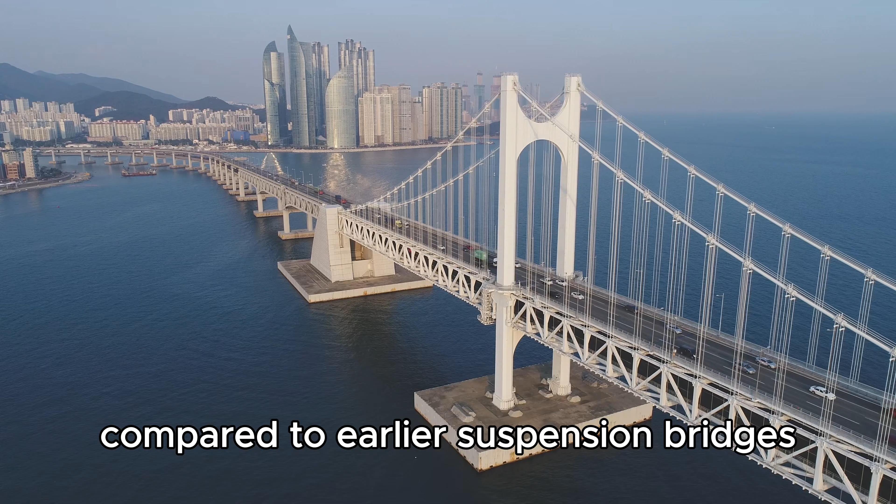Compared to earlier suspension bridges, the Tacoma Narrows Bridge used a slimmer design that required less steel and significantly reduced construction costs. To many people, it was a masterpiece. Construction moved quickly, and excitement grew as the project neared completion.

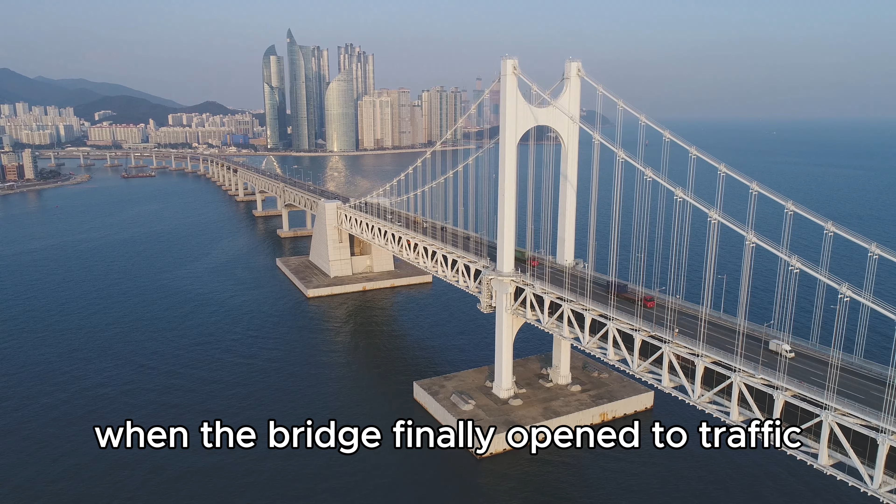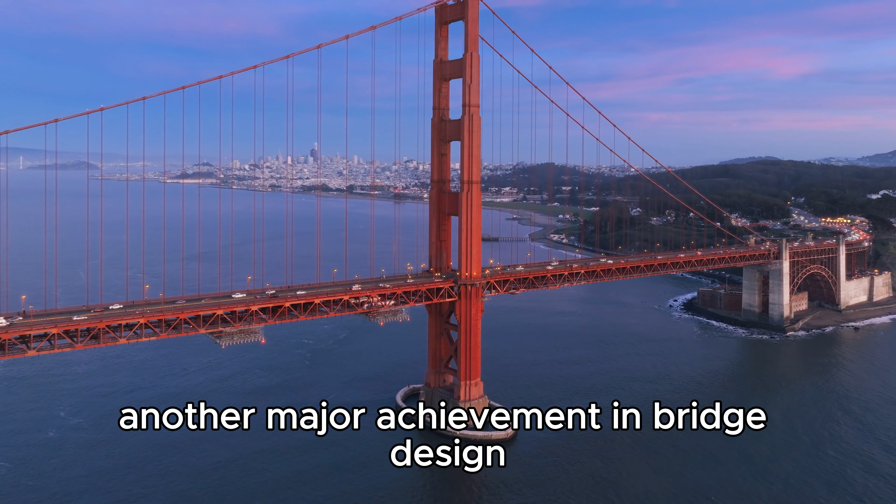When the bridge finally opened to traffic on the 1st of July 1940, thousands of people came to witness the event. Newspapers praised its beauty, drivers admired its sweeping views, and engineers celebrated what appeared to be another major achievement in bridge design. But hidden beneath that elegant appearance was a problem nobody fully understood.

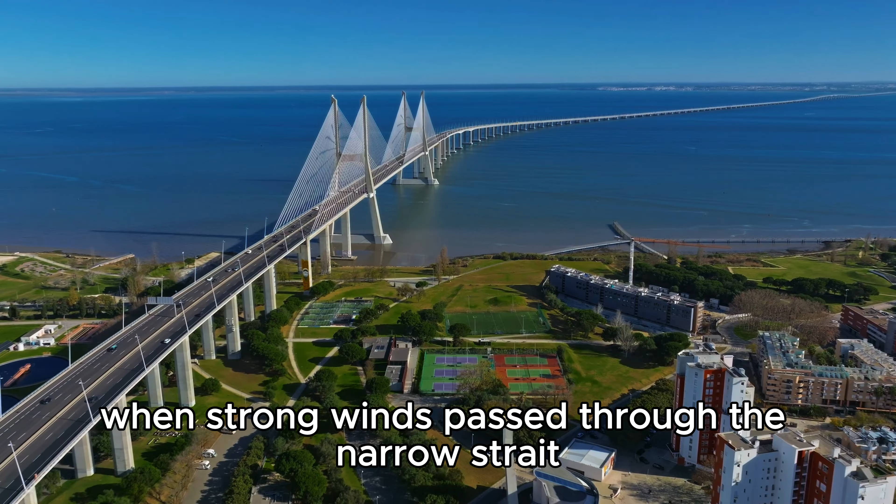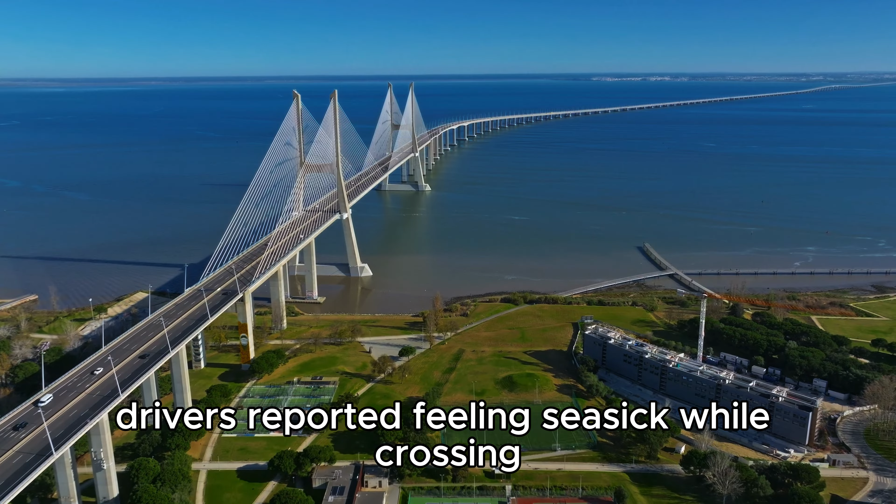Almost immediately after opening, something unusual began to happen. When strong winds passed through the narrow strait below, the bridge started to move. Not a little, a lot. The roadway would rise and fall in large rolling waves. Drivers reported feeling seasick while crossing. Passengers described the experience as riding on an ocean swell. Some people were fascinated. Others were terrified.

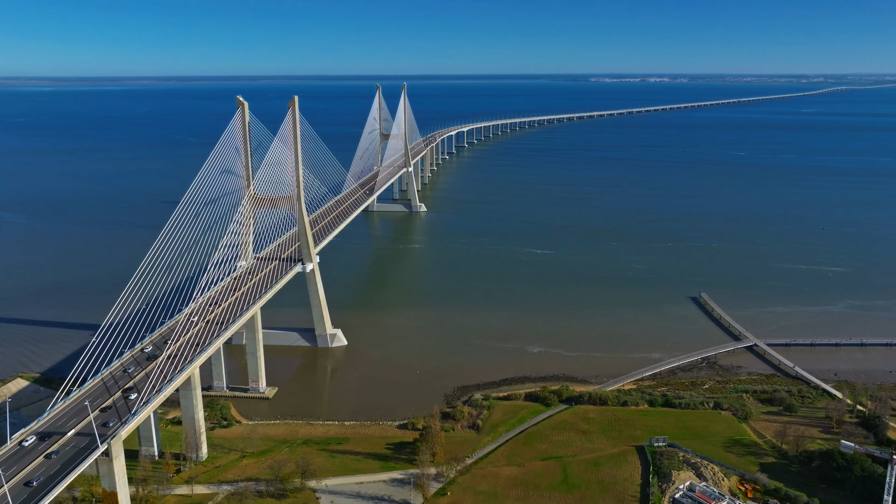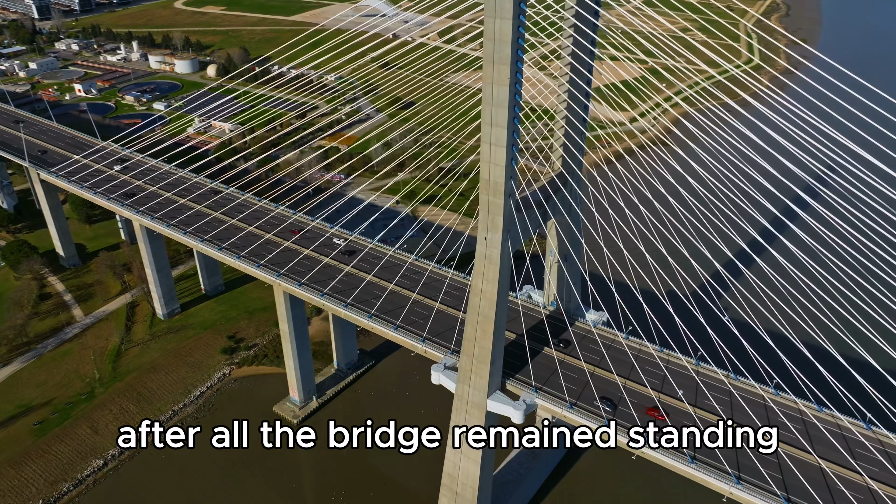The bridge quickly earned a strange nickname: Galloping Gertie. At first, the movement seemed more amusing than dangerous. After all, the bridge remained standing. Traffic continued to cross, and engineers believed the issue could eventually be solved. But what looked like a harmless curiosity would soon become one of the most famous engineering failures in history.

Many engineers remained confident. They believed the bridge's movement was simply an inconvenience rather than a serious structural threat. Small adjustments were discussed. Possible solutions were considered. And few people imagined that the bridge's unusual behavior would soon attract worldwide attention. Because just 4 months after opening, the bridge would destroy itself.

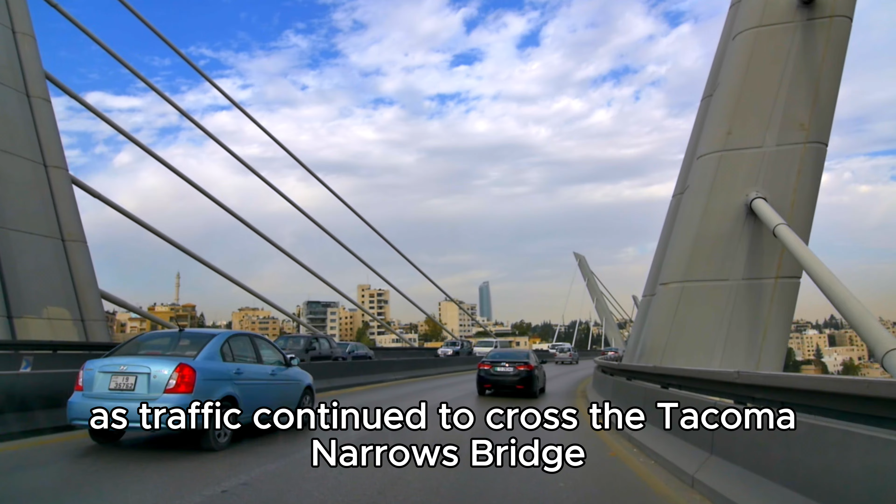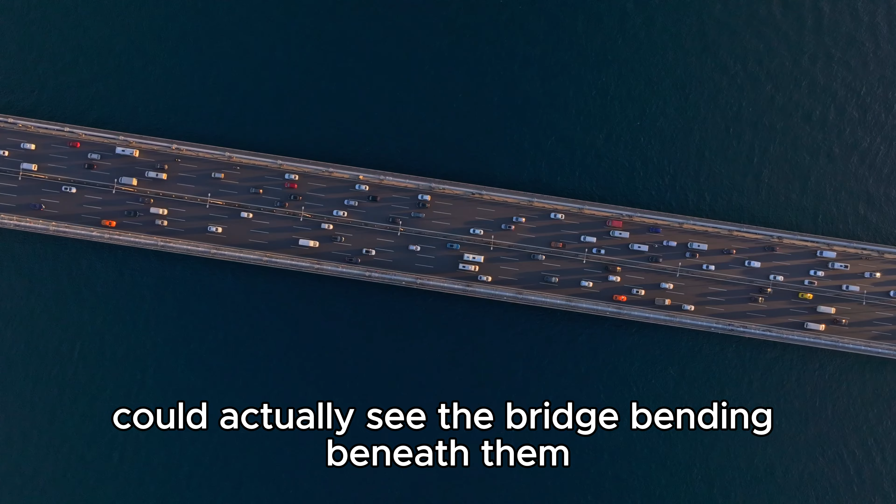As traffic continued to cross the Tacoma Narrows Bridge, its unusual behavior became impossible to ignore. Almost every day, the bridge moved. When winds swept through the narrow channel below, the roadway would begin rising and falling in long, rolling waves. Drivers could actually see the bridge bending beneath them. Some vehicles bounced up and down as they crossed. Others slowed to a crawl, unsure of what they were experiencing.

The motion was so unusual that many local residents came simply to watch. Photographers captured images of the bridge flexing in the wind. News reporters began covering the phenomenon, and before long, the bridge had become something of a local attraction. Its famous nickname, Galloping Gertie, spread throughout the region. People joked about the bridge. Visitors stopped to observe it. Some even crossed it just to experience the strange motion for themselves.

But behind the curiosity and amusement, engineers were becoming increasingly concerned. Large bridges are designed to move. Expansion, contraction, and minor vibrations are completely normal. But the Tacoma Narrows Bridge was behaving differently. The movement was becoming larger than expected. And more importantly, it was happening repeatedly.

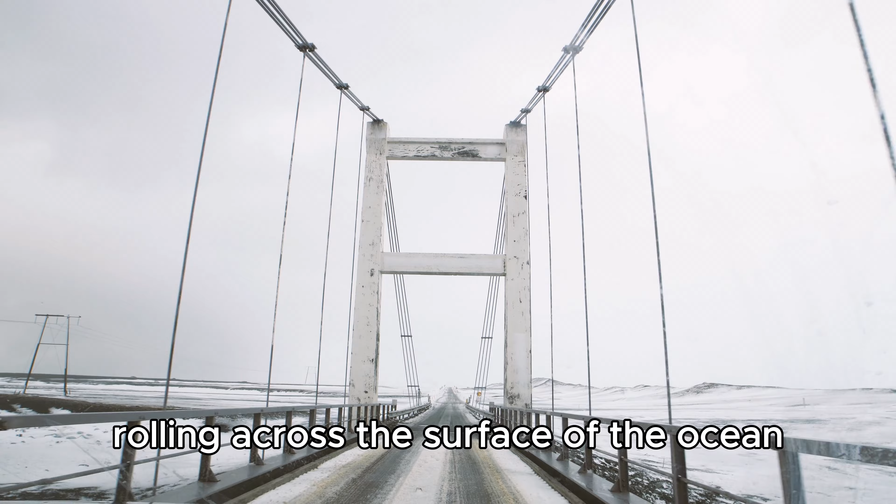On windy days, the bridge seemed almost alive. The deck would rise, then fall, then twist slightly before returning to its original position. Witnesses described the motion as similar to waves rolling across the surface of the ocean. Several attempts were made to reduce the oscillations. Engineers installed hydraulic dampers designed to absorb some of the movement. Other modifications were proposed and tested, but none of the solutions proved completely effective.

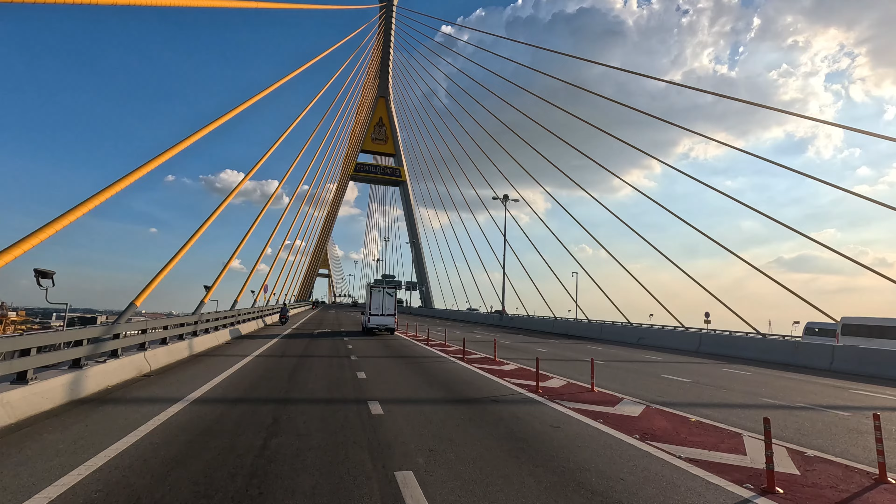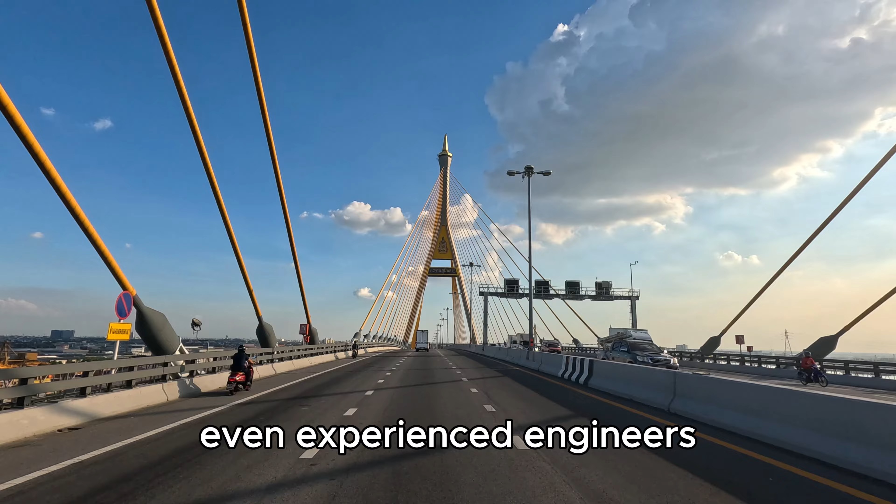The bridge continued to sway. It continued to bounce, and each windy day seemed to produce the same unsettling results. Some drivers refused to cross it altogether. Others reported feeling nervous every time they approached the structure. Even experienced engineers struggled to explain exactly why the bridge was moving so dramatically.

At the time, the science of aerodynamic behavior in long-span bridges was still developing. Many of the tools and testing methods used today simply did not exist. As a result, the true danger remained hidden. What appeared to be a strange but manageable problem was actually a warning sign. The bridge was revealing a weakness that nobody fully understood. And with every passing week, the risk continued to grow. Yet despite all the attention, the bridge remained open.

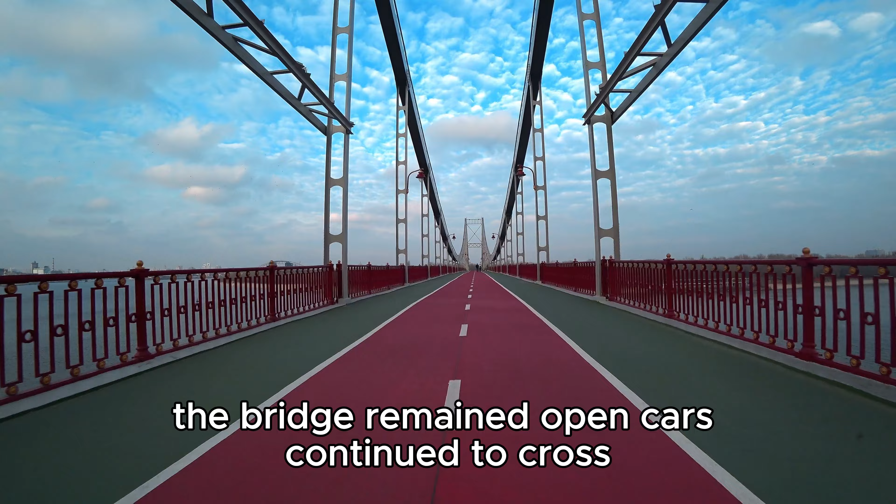Cars continued to cross. People continued to watch. And few realized that the countdown to disaster had already begun. For months, engineers searched for answers. Why was the bridge moving so dramatically?

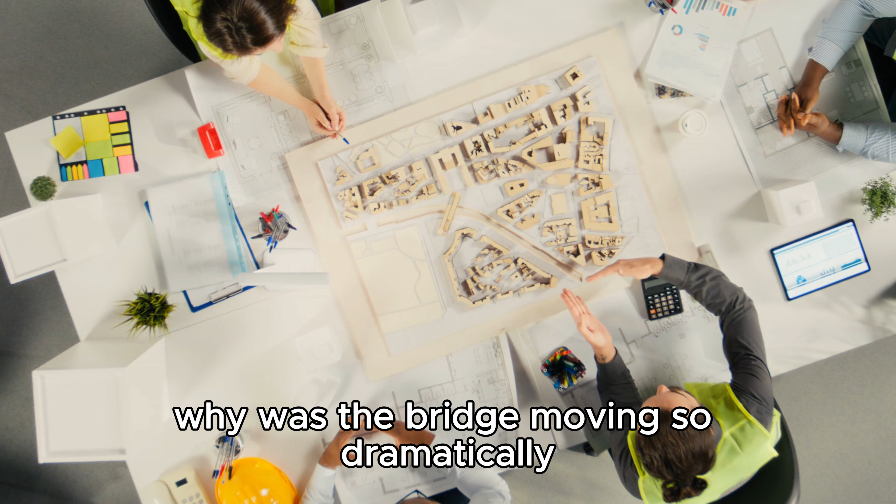At first, many experts believed the problem was relatively simple. Strong winds were passing through the Tacoma Narrows. The bridge was lightweight, and the structure appeared to be unusually flexible. The assumption seemed reasonable, but the real explanation was far more complex. To understand what happened, we need to understand how suspension bridges behave.

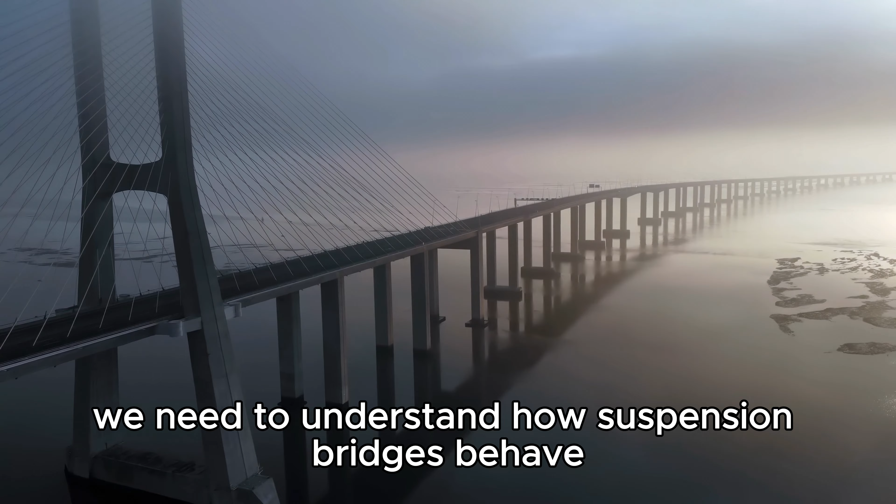Unlike solid concrete structures, suspension bridges are designed to move. They expand and contract with temperature changes. They respond to traffic loads, and they flex under wind forces. A certain amount of movement is completely normal. The problem begins when movement starts feeding itself. And that is exactly what was happening on the Tacoma Narrows Bridge.

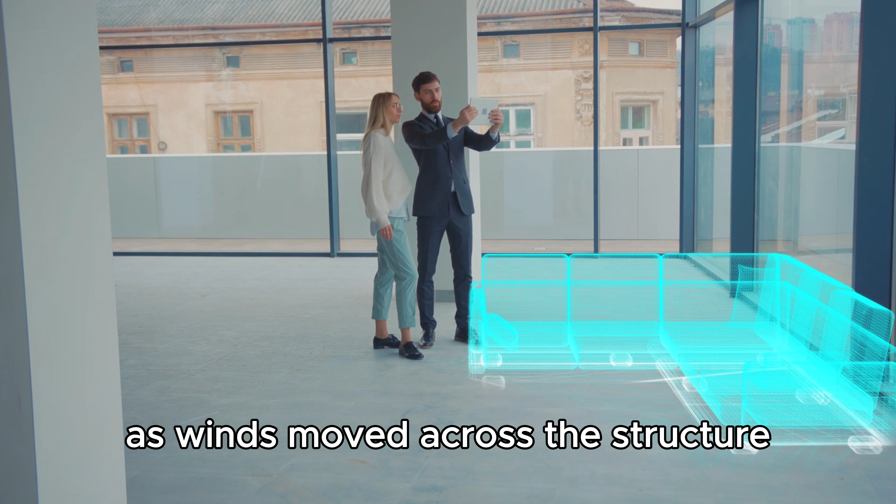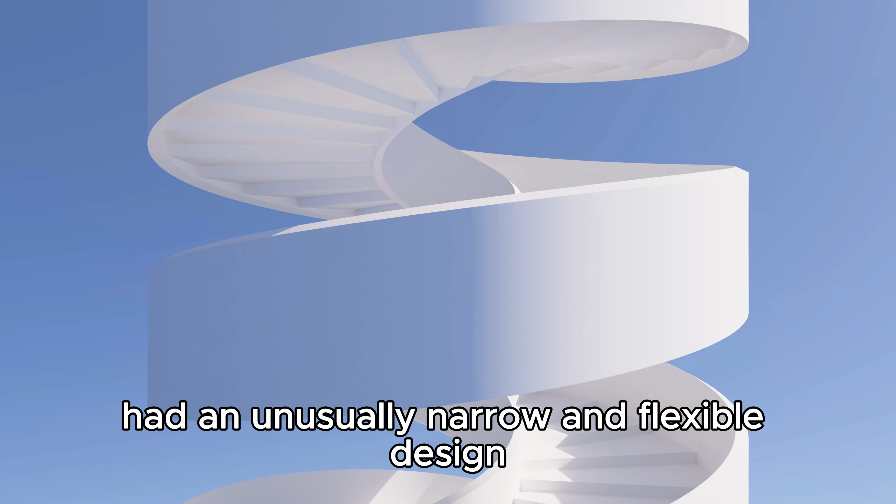As winds moved across the structure, they created forces that pushed and pulled on the bridge deck. Normally, these forces are small enough for a bridge to absorb safely, but the Tacoma Narrows Bridge had an unusually narrow and flexible design. Its roadway deck was slimmer than many engineers now considered safe. This made the structure vulnerable to aerodynamic effects that were not fully understood at the time.

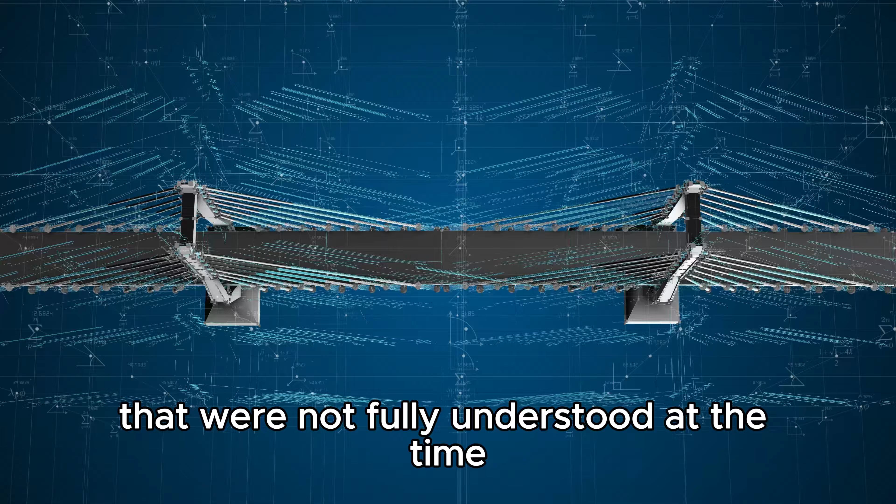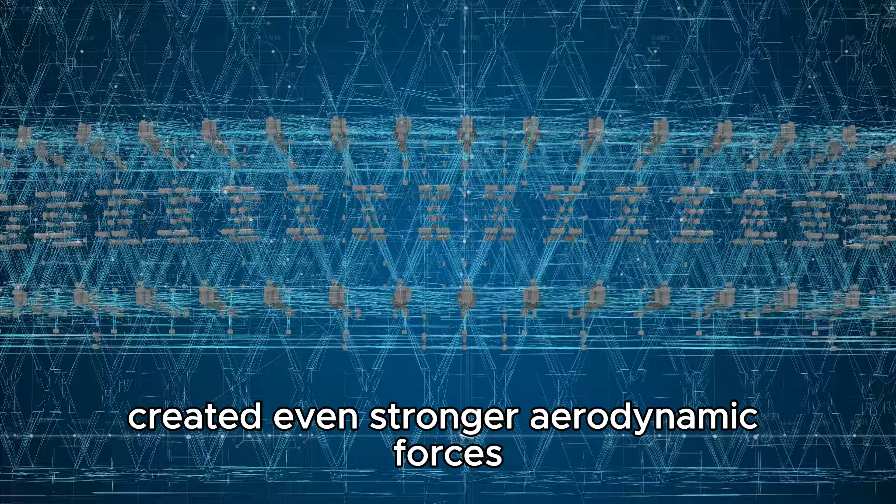As wind flowed around the bridge, it began generating oscillations. Small movements became larger movements. Larger movements created even stronger aerodynamic forces. Those forces generated even more movement. The cycle continued repeating itself. The bridge was no longer simply responding to the wind. The bridge was interacting with the wind. And that distinction changed everything.

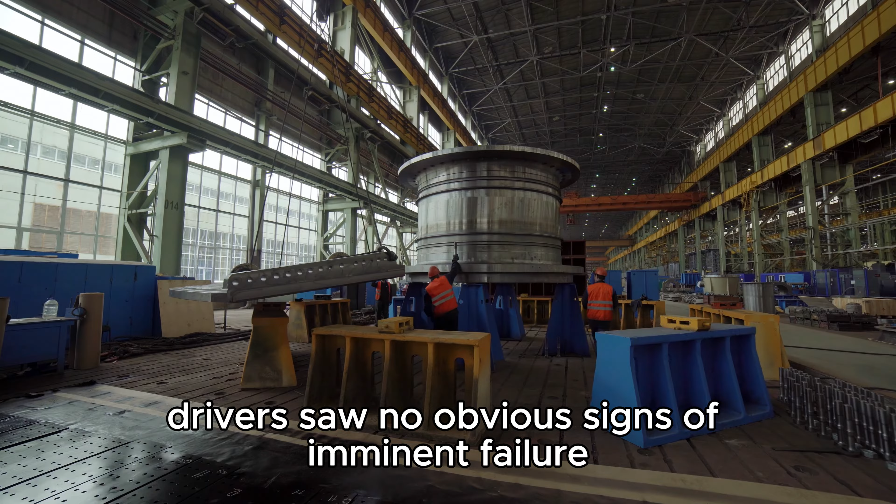What made the situation particularly dangerous was that the bridge appeared stable much of the time. On calm days, traffic crossed normally. Drivers saw no obvious signs of imminent failure. The structure looked strong. The towers stood firm. The cables remained intact. From a distance, everything seemed perfectly safe. But engineers were beginning to realize that the problem wasn't located in the towers or cables. The problem was hidden within the behavior of the bridge deck itself.

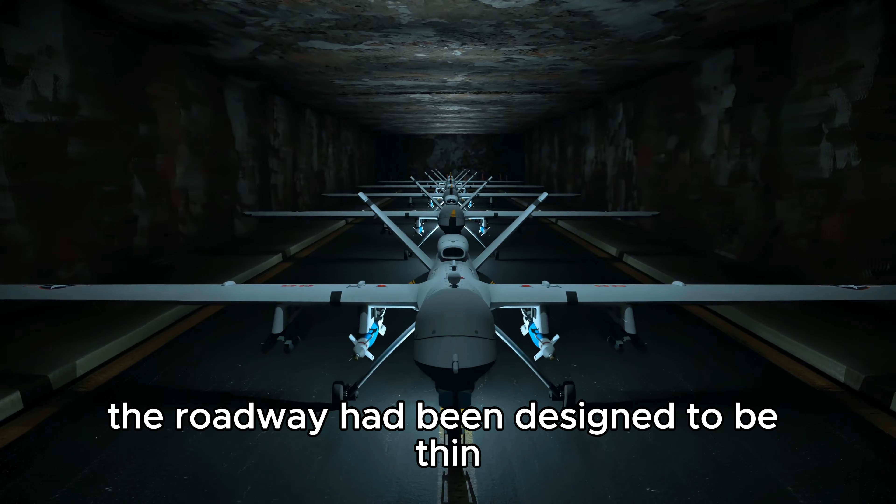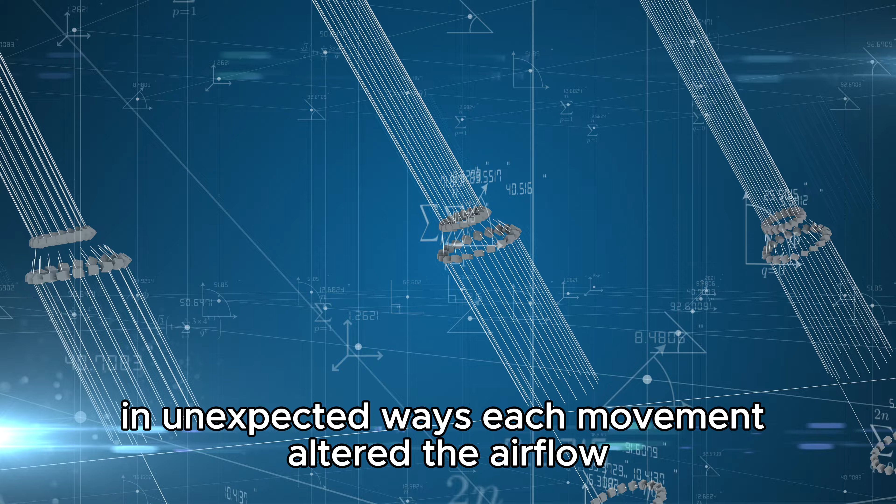The roadway had been designed to be thin and lightweight. This reduced construction costs and improved efficiency. However, it also reduced the structure's ability to resist certain aerodynamic forces. As wind flowed around the deck, air pressure changed continuously. Instead of passing harmlessly around the bridge, the airflow began interacting with the structure in unexpected ways. Each movement altered the airflow, and the altered airflow created even more movement. The bridge had effectively entered a feedback loop.

This is one of the reasons the Tacoma Narrows disaster became so important in engineering history. It demonstrated that wind is not simply a force acting on a structure. In some situations, the structure itself can influence the wind around it. When those interactions become synchronized, movement can grow rapidly and unpredictably.

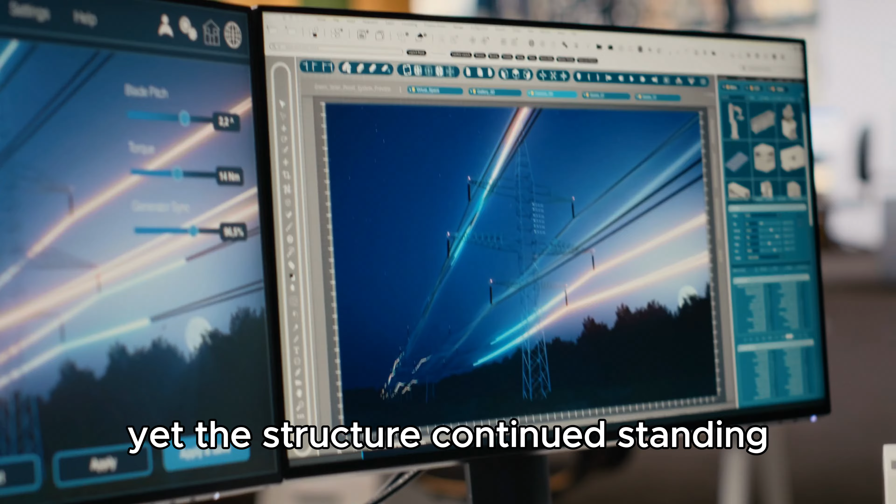Videos recorded before the collapse show the bridge twisting dramatically from side to side. Sections of the roadway appeared to move independently. At times, the motion looked almost impossible. Many observers could hardly believe that a bridge could behave that way without immediately collapsing. Yet the structure continued standing, and that created a false sense of security. Each day the bridge survived seemed to suggest that the problem was manageable. But the forces building inside the structure were becoming increasingly severe.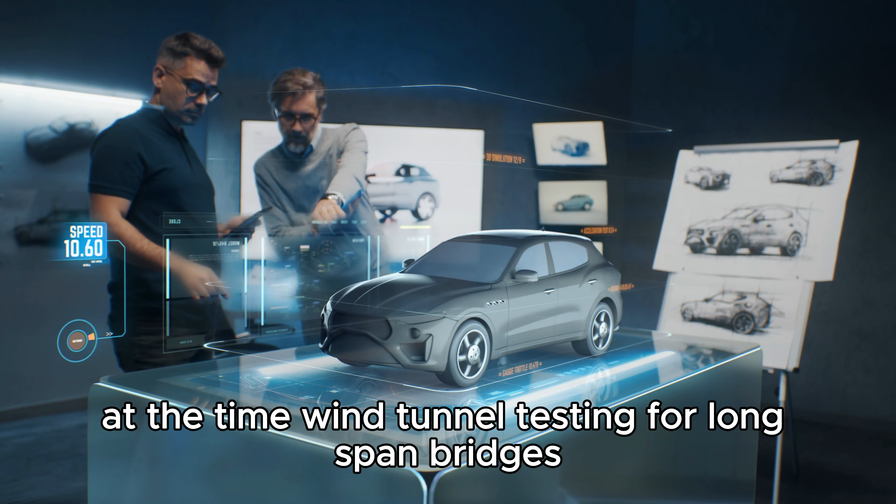Engineers observed the motion. Measurements were taken. Reports were written. But despite growing concern, nobody fully understood the scale of the danger. At the time, wind tunnel testing for long-span bridges was still in its early stages. Many modern engineering tools had not yet been developed. Computer simulations did not exist. Advanced aerodynamic modeling did not exist, and engineers were entering territory that few had explored before.

As the months passed, the bridge continued behaving in increasingly unusual ways. The roadway twisted, the cables vibrated. Sections of the structure moved in ways designers had never expected. What looked like a strange curiosity was actually a warning. The bridge was revealing a fundamental flaw in its design, but the warning was not fully recognized. And by the time engineers began to understand the problem, there was very little time left. The phenomenon responsible for the disaster is now known as aeroelastic flutter.

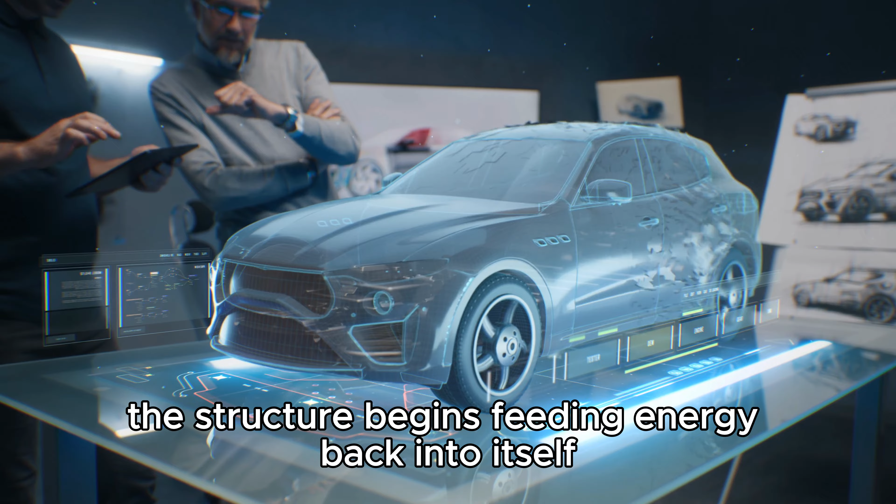Unlike ordinary vibration, flutter can continuously increase in strength when conditions are right. Instead of dissipating energy, the structure begins feeding energy back into itself. The result is a self-amplifying cycle. Each movement becomes larger than the last. Each oscillation becomes more violent, and eventually, the structure can no longer withstand the forces acting upon it.

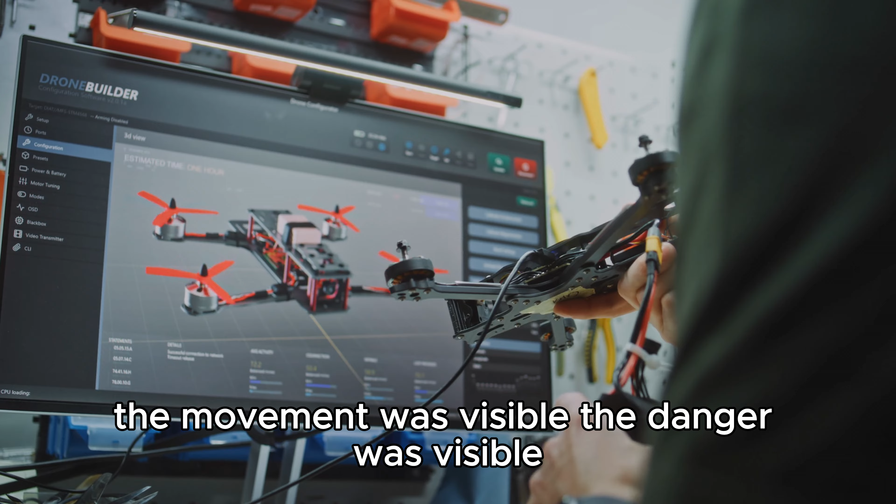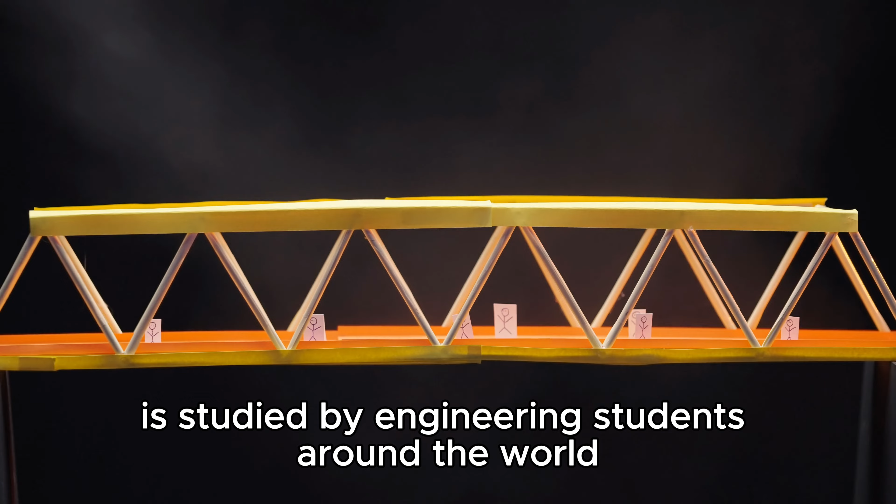The warning signs were visible. The movement was visible. The danger was visible. What remained invisible was how close the bridge was to failure. Today, aeroelastic flutter is studied by engineering students around the world. It has become one of the most famous lessons in structural engineering history. But in 1940, it was still largely misunderstood. And the Tacoma Narrows Bridge was about to become the experiment that taught the world a very expensive lesson.

Because on the morning of the 7th of November 1940, everything finally went wrong. On the morning of the 7th of November, 1940, conditions at the Tacoma Narrows Bridge were far from unusual. Strong winds were blowing through the narrow strait, but for Galloping Gertie, movement had already become a familiar sight. The bridge had been oscillating for months. Drivers, engineers, and local residents had all witnessed its strange behavior before.

At first, the motion seemed similar to what had been observed many times earlier. The roadway rose and fell, the structure twisted, and the bridge continued flexing under the force of the wind. But this time was different. As the morning progressed, the oscillations became increasingly severe. Witnesses watched in disbelief as sections of the roadway began moving dramatically up and down. The bridge no longer appeared flexible. It appeared unstable. Traffic was stopped. Officials quickly realized the situation was becoming dangerous.

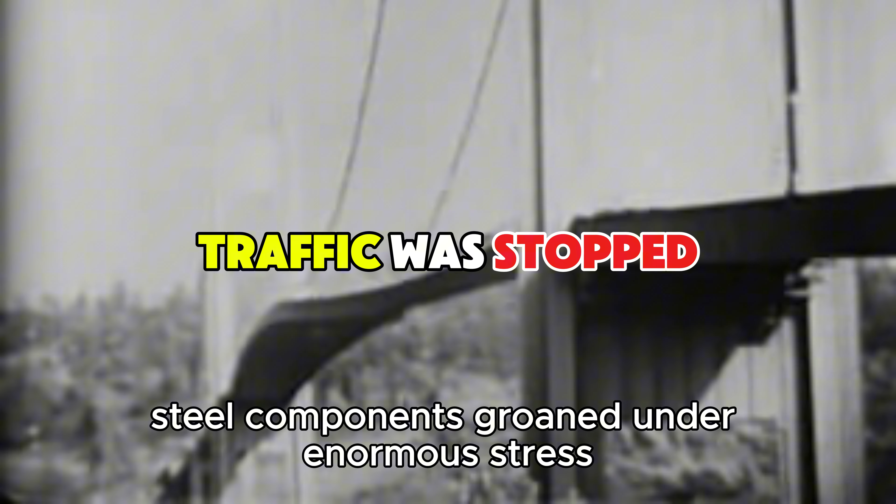Most drivers managed to leave the structure safely, but the bridge itself remained trapped in a battle against forces its designers had never anticipated. The twisting motion continued growing stronger. Steel components groaned under enormous stress. Suspension cables shook violently. The roadway bent in ways that seemed impossible for a bridge of its size. Photographers and engineers captured footage of the event. Those images would later become some of the most famous recordings in engineering history.

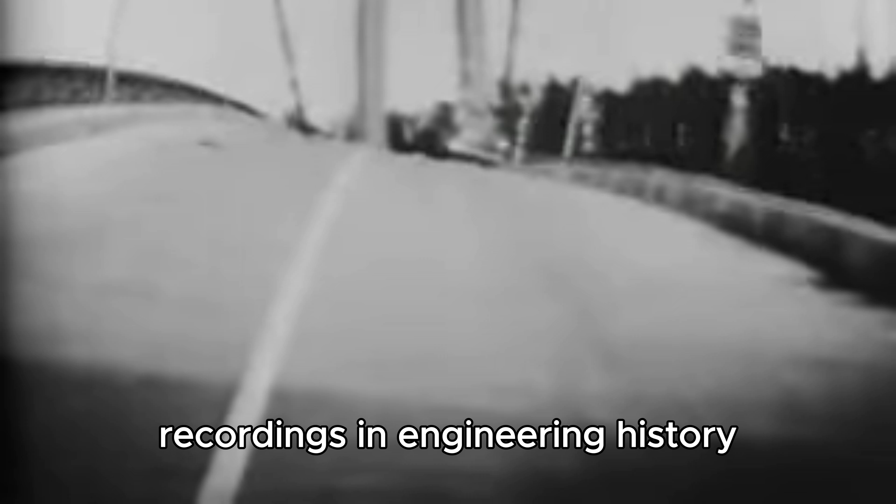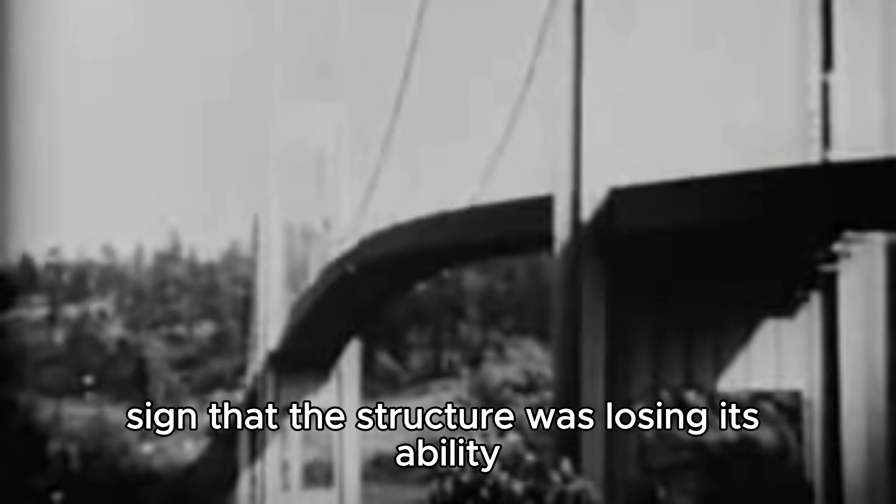By this point, the bridge was experiencing motions far beyond anything seen during normal operation. Witnesses described the roadway as twisting like a ribbon in the wind. Some sections appeared to rise, while others dropped dramatically. The movement was no longer merely uncomfortable for drivers. It had become a clear sign that the structure was losing its ability to resist the forces acting upon it. Engineers watching the event realized they were observing something extraordinary. The bridge was demonstrating a failure mechanism that had never been fully understood before. Every minute, the oscillations grew more violent, and every minute the chances of saving the structure became smaller.

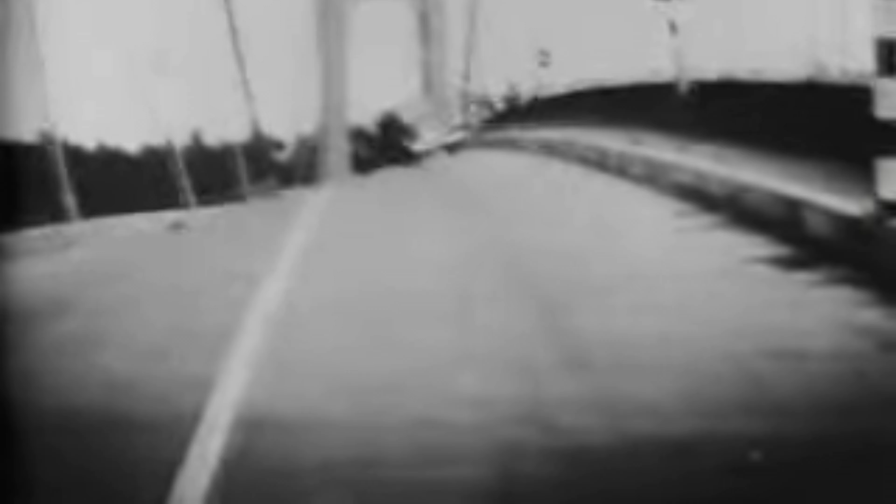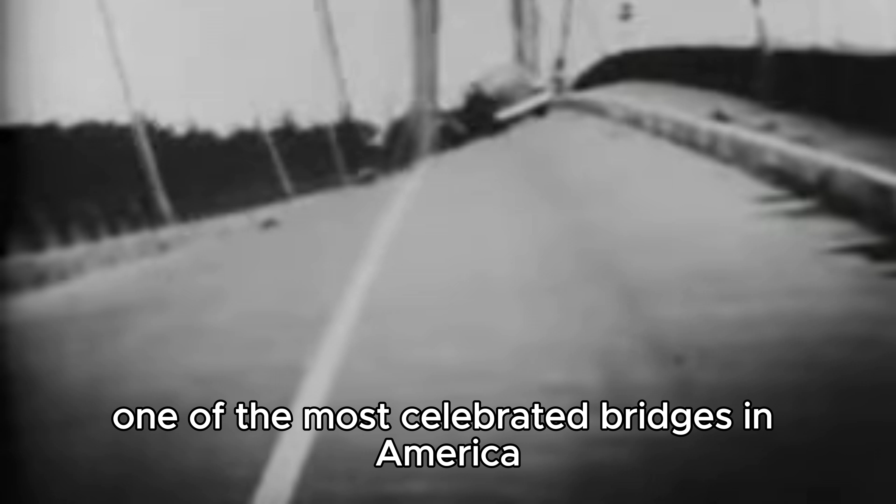Then the structure reached its limit. A section of the roadway suddenly failed. Concrete and steel crashed into the water below. Moments later, additional sections followed. Piece by piece, the bridge began tearing itself apart. The collapse unfolded before the eyes of shocked witnesses. Within a matter of hours, one of the most celebrated bridges in America had been reduced to wreckage. Remarkably, no human lives were lost during the disaster, but the engineering consequences were enormous.

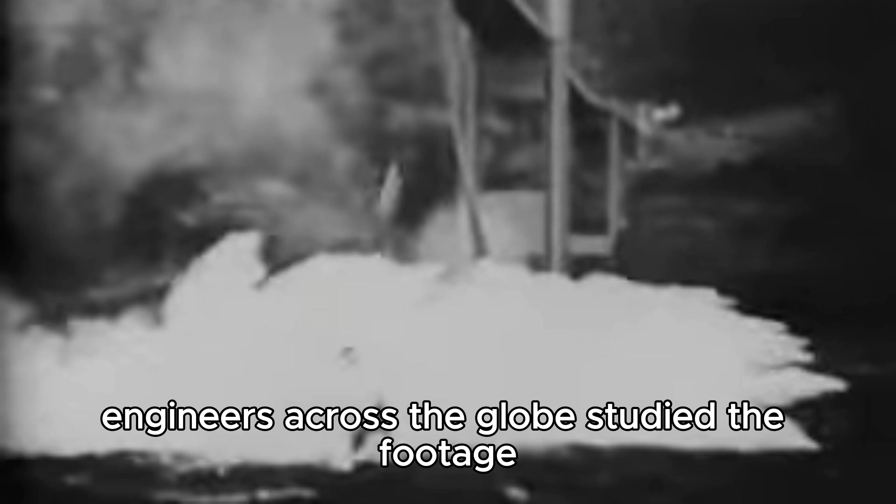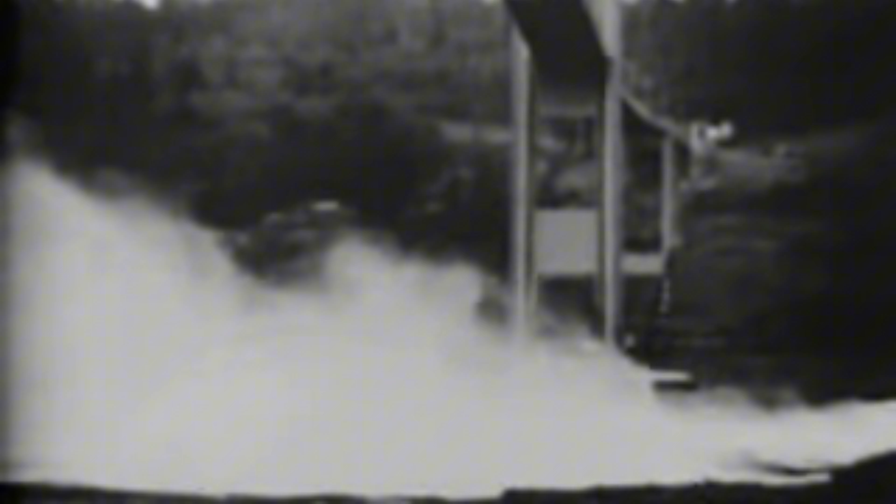The collapse immediately attracted worldwide attention. Engineers across the globe studied the footage. Universities analyzed the failure, and the Tacoma Narrows Bridge became one of the most important case studies ever recorded. The bridge had stood for only 4 months. Yet its failure would influence bridge design for generations to come. In the aftermath of the collapse, engineers faced an important question. What exactly caused the Tacoma Narrows Bridge to fail?

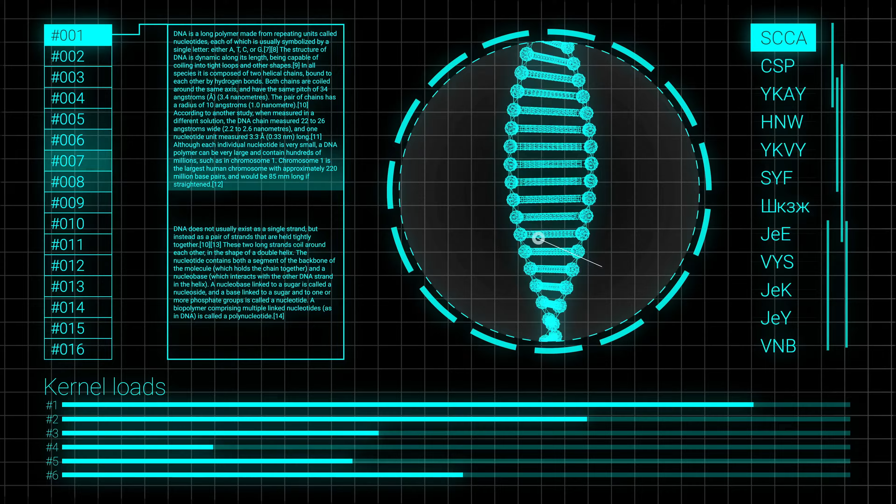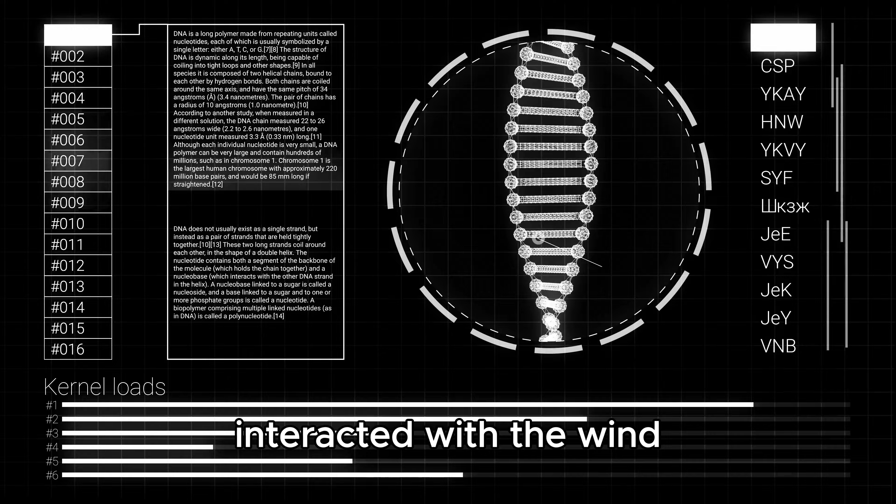At first, many people blamed the wind itself. After all, strong winds were present on the day of the disaster. But further investigations revealed that the real problem was far more complicated. The bridge did not collapse simply because the wind was strong. It collapsed because of the way the structure interacted with the wind. The Tacoma Narrows Bridge had been designed with a very narrow and flexible deck. This made the bridge lighter and less expensive to build. However, it also made the structure vulnerable to aerodynamic instability. As wind passed around the bridge, it generated forces that caused the roadway to move.

Those movements altered the airflow. The altered airflow created even greater movement. The cycle repeated over and over again. Instead of reducing vibration, the bridge began amplifying it.

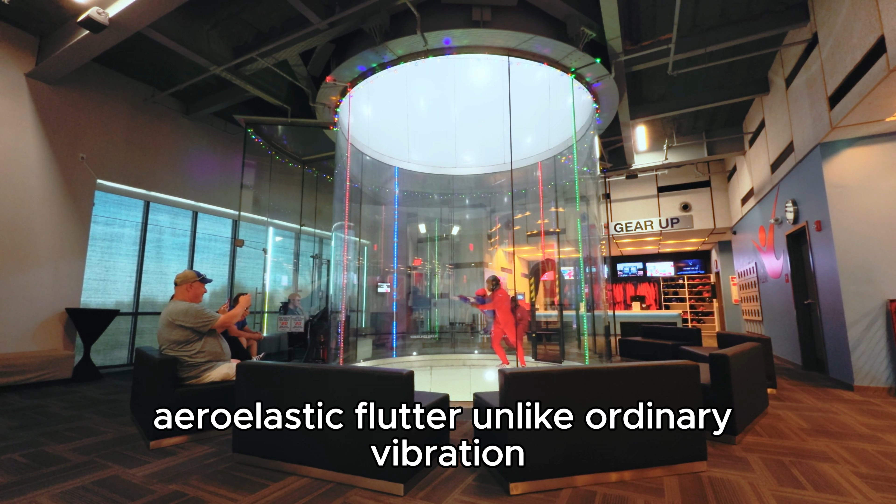Engineers now refer to this phenomenon as aeroelastic flutter. Unlike ordinary vibration, flutter can continuously increase in strength once certain conditions are reached. The structure essentially feeds energy back into itself. Each movement becomes larger than the last. Each twist becomes more severe. And eventually, the forces exceed what the structure can withstand.

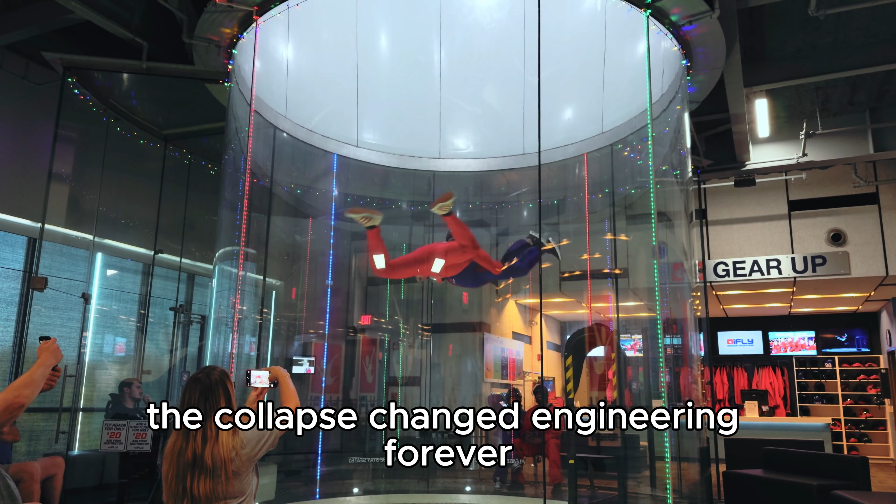The collapse changed engineering forever. Researchers began studying how wind interacts with bridges in much greater detail. Before Tacoma Narrows, many bridge designers focused primarily on structural strength. If a bridge could support its own weight, traffic loads, and expected environmental forces, it was generally considered safe. The collapse revealed that strength alone was not enough.

Engineers also needed to understand how a structure would behave dynamically over time. A bridge could be strong and still fail if its interaction with wind was not properly understood. This realization changed the way engineers approached large-span structures. For the first time, aerodynamic behavior became a critical part of the design process. Researchers began conducting extensive experiments to understand how wind could influence bridges, buildings, towers, and other flexible structures.

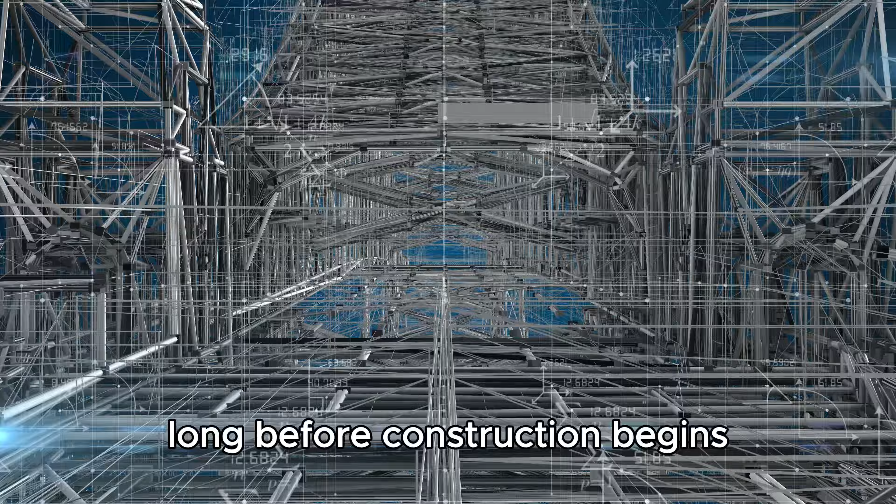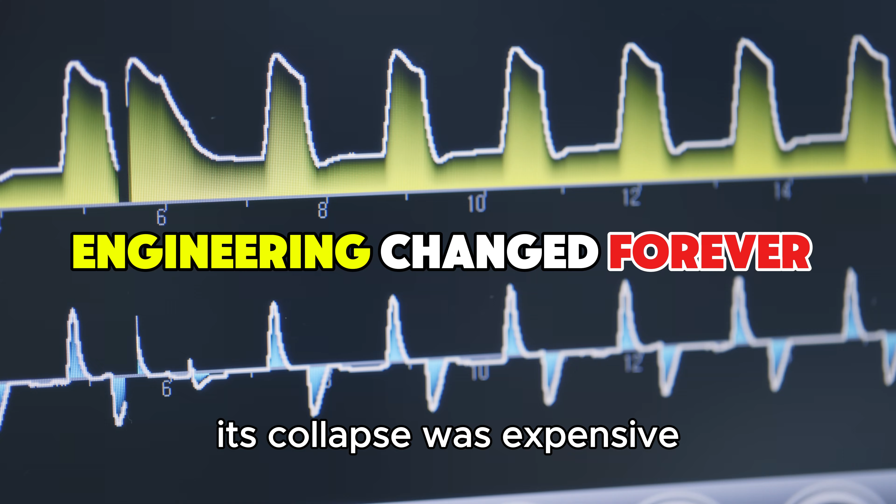Wind tunnel testing became standard practice for major bridge projects. Engineers developed new methods to predict aerodynamic behavior long before construction begins. Modern suspension bridges are now designed with lessons learned directly from Tacoma Narrows. In many ways, the bridge failed, so future bridges would not. Its collapse was expensive, it was embarrassing, and it shocked the engineering world. But it also transformed the science of bridge design and helped make future structures safer than ever before.

The Tacoma Narrows Bridge stood for only 4 months. Just 4 months. After years of planning, design, and construction, one of America's most ambitious bridges disappeared in a matter of hours. For most projects, that would have been the end of the story. But for Tacoma Narrows, it was only the beginning. The collapse shocked the engineering community. Newspapers around the world reported the disaster. Photographs spread rapidly. And perhaps most importantly, the entire event had been captured on film.

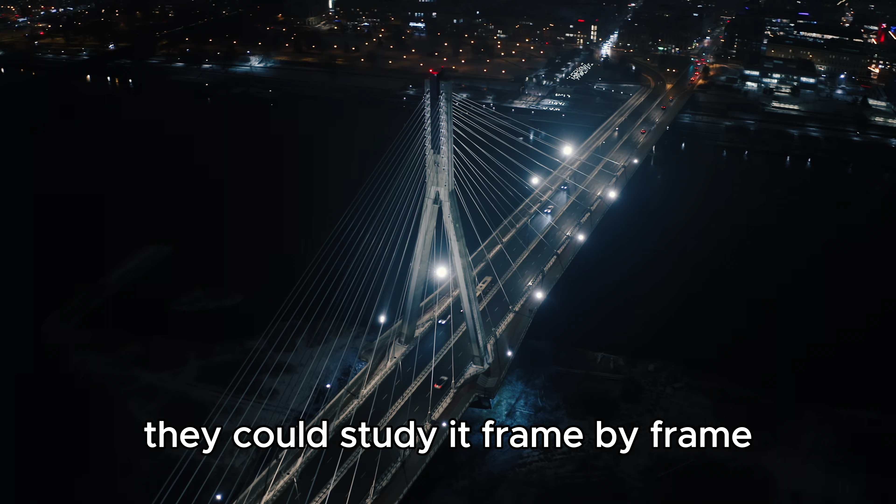For the first time in history, engineers could repeatedly watch a major structural failure unfold. They could study it frame by frame, analyze every movement, and learn directly from the disaster itself. The bridge became a classroom for an entire generation of engineers. Universities began using the footage in engineering courses. Researchers spent years investigating exactly what happened, and the lessons learned from Tacoma Narrows would influence countless future projects.

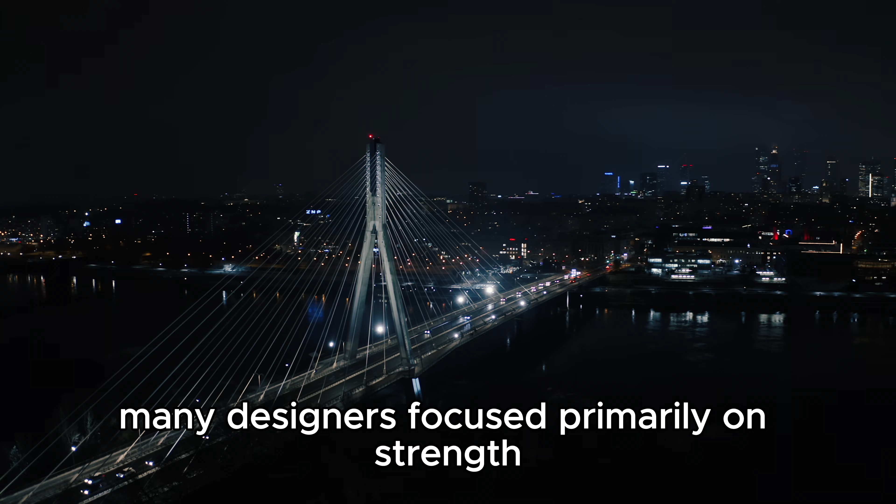Before the collapse, many designers focused primarily on strength. Could the bridge support traffic? Could it withstand its own weight? Could it survive expected environmental loads? Tacoma Narrows revealed a different challenge. A structure could be strong and still fail. Understanding how wind interacts with a structure became just as important as understanding concrete, steel, and cables.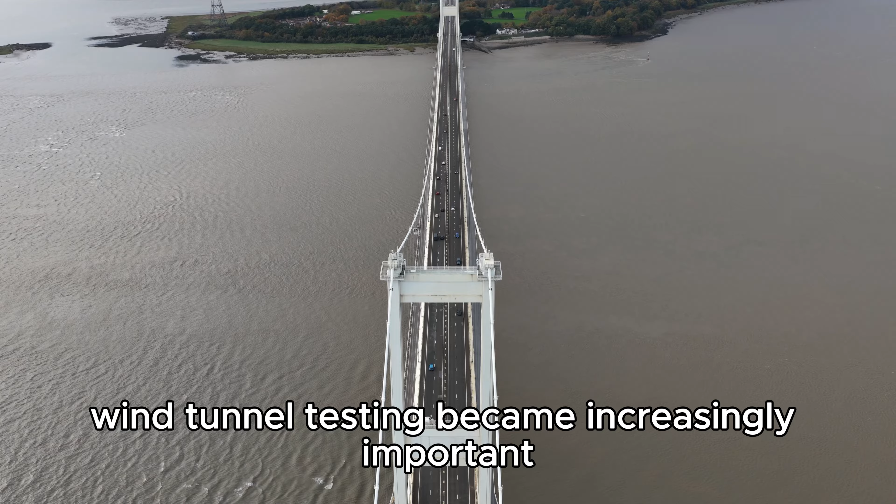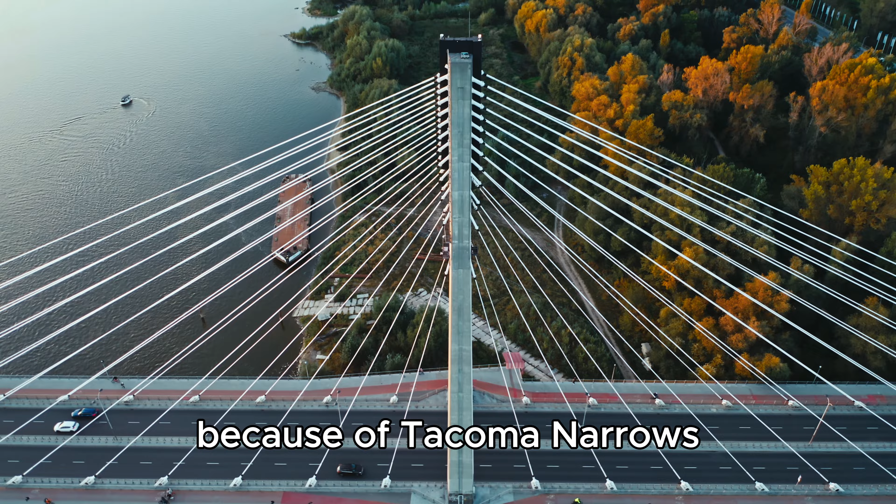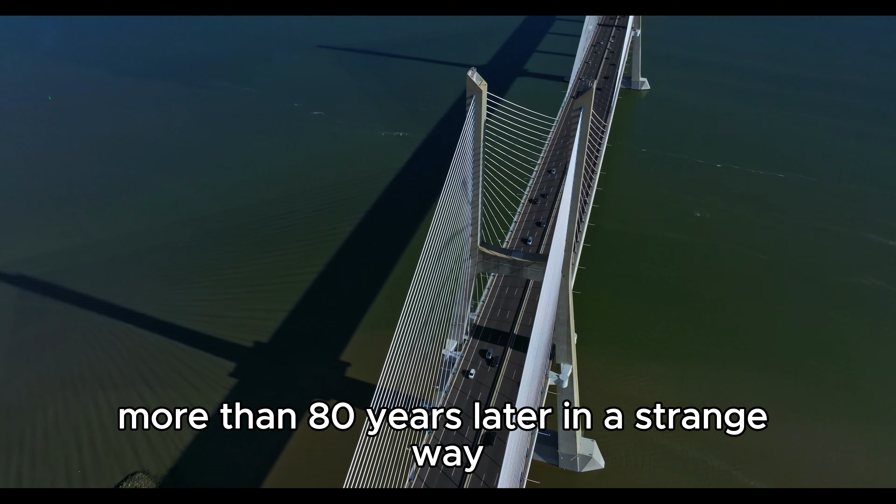The disaster accelerated research into aerodynamics. Wind tunnel testing became increasingly important. Engineers developed new methods to analyze vibration, resonance, and structural behavior. Many of the safety standards used today can trace part of their history back to the lessons learned from Galloping Gertie. Modern suspension bridges look different because of Tacoma Narrows. Modern bridge testing exists because of Tacoma Narrows. And modern engineers continue studying the disaster more than 80 years later. In a strange way, the bridge became more famous after its collapse than it ever was while standing.

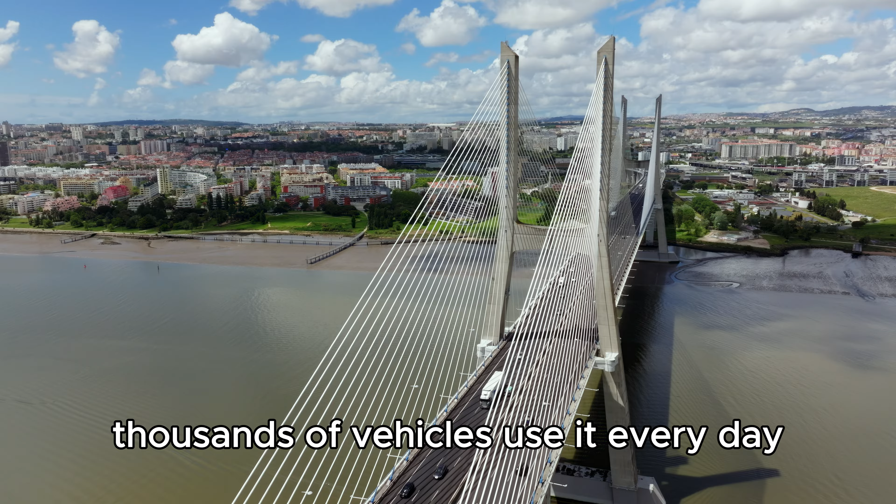Today, a replacement bridge crosses the Tacoma Narrows. Thousands of vehicles use it every day. Most travelers never think about the structure that came before, but engineers do, because hidden behind every successful design is a history of failures, mistakes, and lessons learned. The story of Galloping Gertie reminds us that engineering is a constant process of learning. Every project teaches something, every mistake reveals something, and sometimes a single failure can change an entire profession. The Tacoma Narrows Bridge survived for only 4 months, but its lessons may last forever.